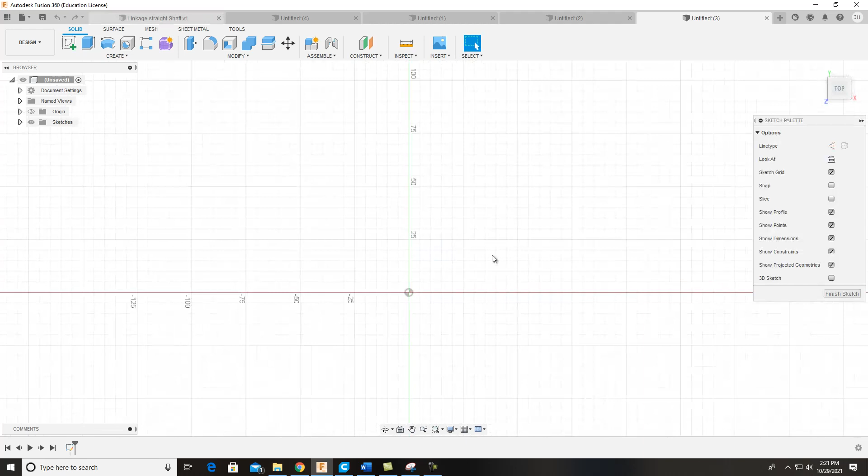So we go to File, New, or we're going to a new sketch, and I'm going to click right here. I want to use the same linkage pin size, 70, and I'll do a 50 here. Finish that sketch and extrude it out. I want 30 millimeters there. So again, this was 70 OD diameter, 50 ID diameter, and the thickness and depth of it's 30 millimeter. Go ahead and make that.

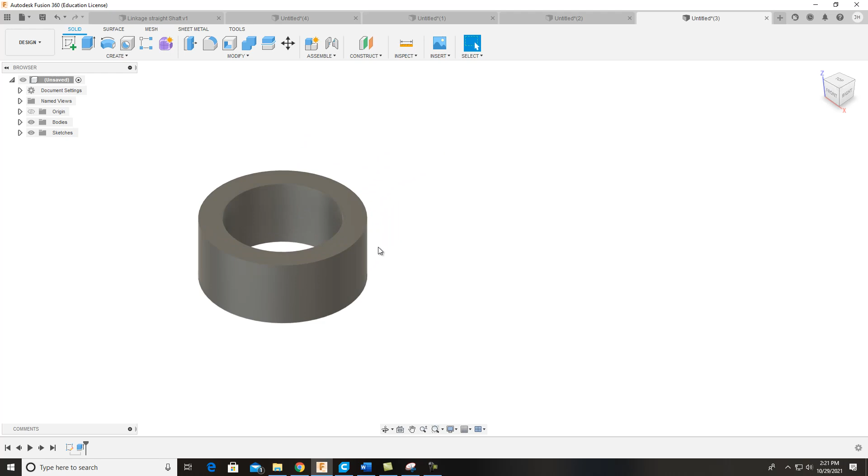Now we're going to put another one over here, the same size at 90 degrees. It's going to come up at an angle, like a bracket, an angle bracket linkage.

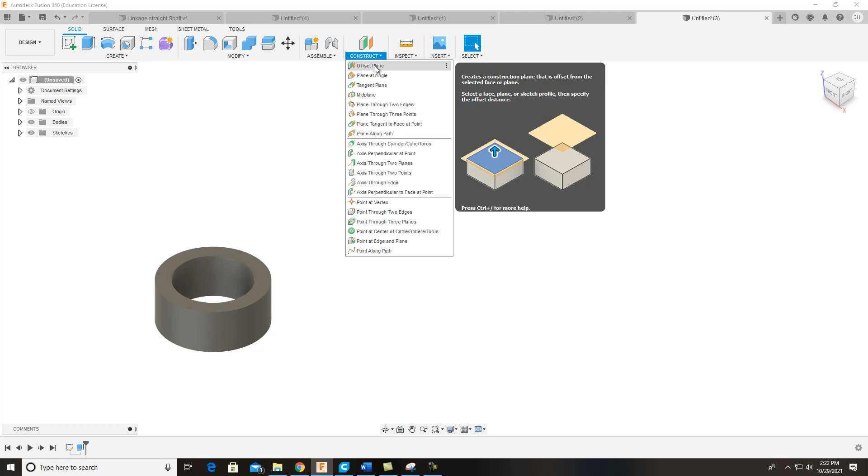What you're going to do on this one is come over here and construct an offset plane. I grab this one, come back 200 millimeter offset, and then hit OK or Enter.

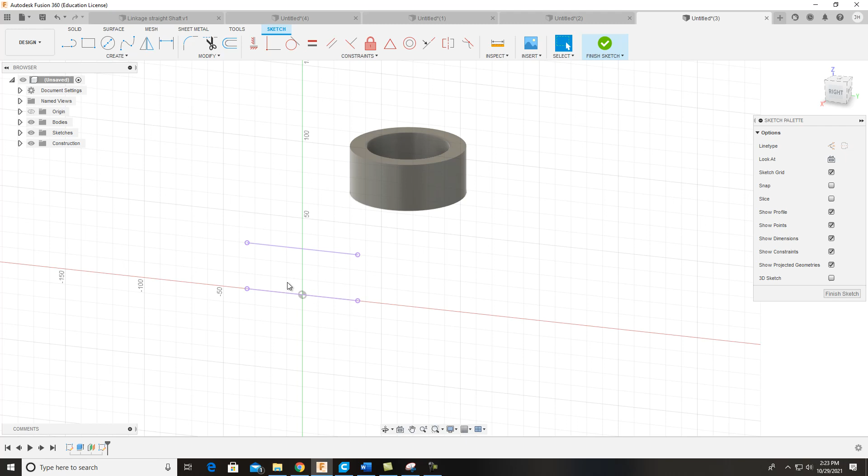Now, with that one, I want to do another quick sketch. I hit my sketch there, and before I do that, I want to project the geometry because I want this to be straight in line with this. So I'll go up here to Create, come down to Project, and I click on these lines here. If I turn it, do you see how I'm projecting that image onto my work plane, my sketch plane? So now I can use that.

Whenever I come up through here, see how I'm lined up? I got a little tracking line showing me that. So I come up here and do a 70, then a 50, and I got that in.

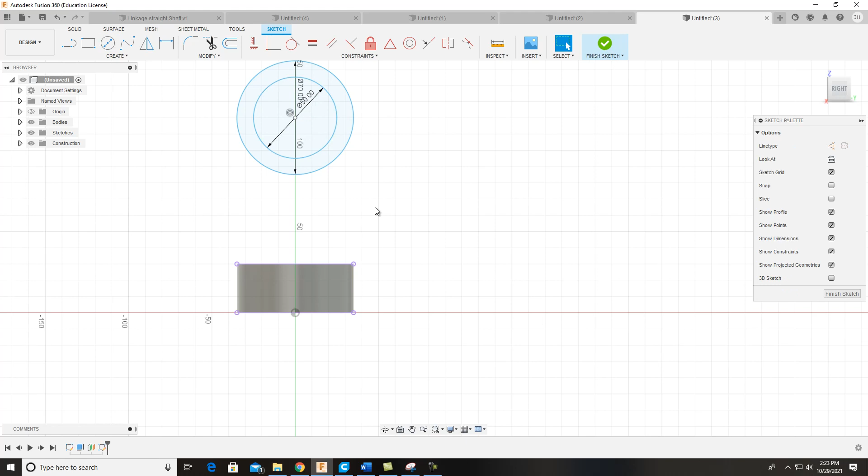Now I want to turn it a little bit so you can see it, and then put in from the bottom of this thing up to there should be 150. At this point, go ahead and stop and get your set exactly like I have it.

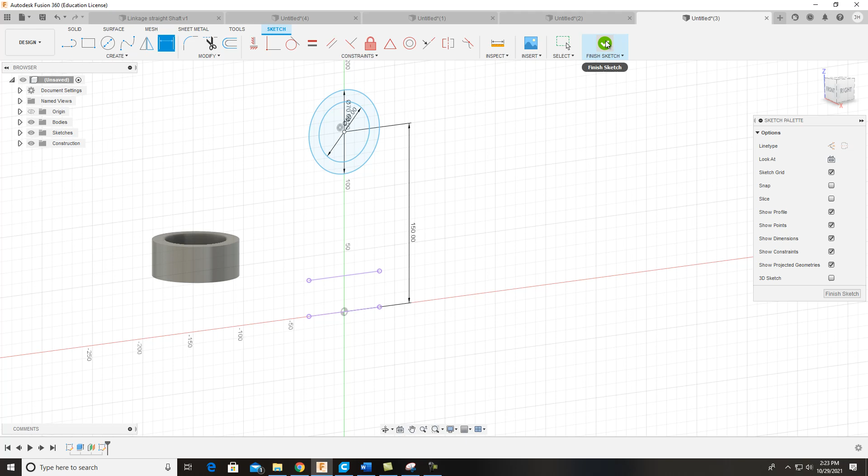All right, we're back. Finish the sketch out, and we're going to extrude it. When we extrude it, we want to go this direction, not this direction, because this is exactly 200, which was the spec, to this face. So it'll be a negative 30, exactly the same size as that one.

Whenever I start taking a look at this thing and turning it around, you see it's going from the center of it, you're going to have an angle bracket coming in. Now to do that, I need a work plane right in the middle of this.

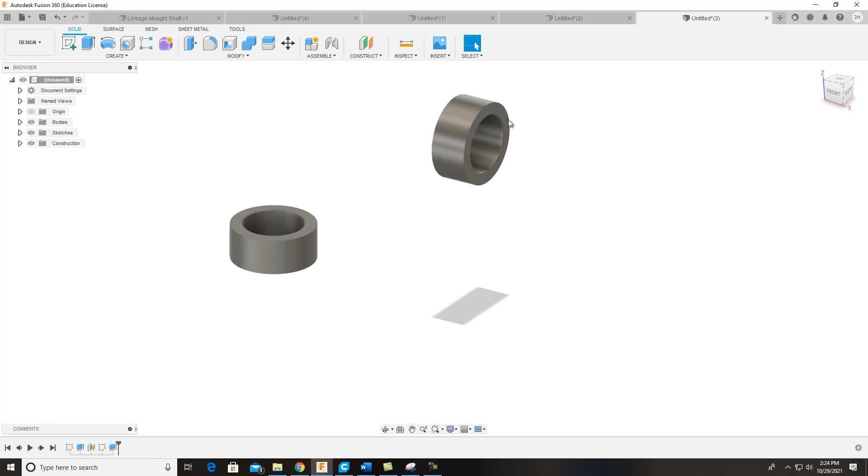If I come up here to construct, I can do tangent plane. I click on my part, and then up here at the top... let's kind of turn around here. Let's do it again, I accidentally hit that. Cancel that, do it again, tangent plane, and I've already got it snapped to it.

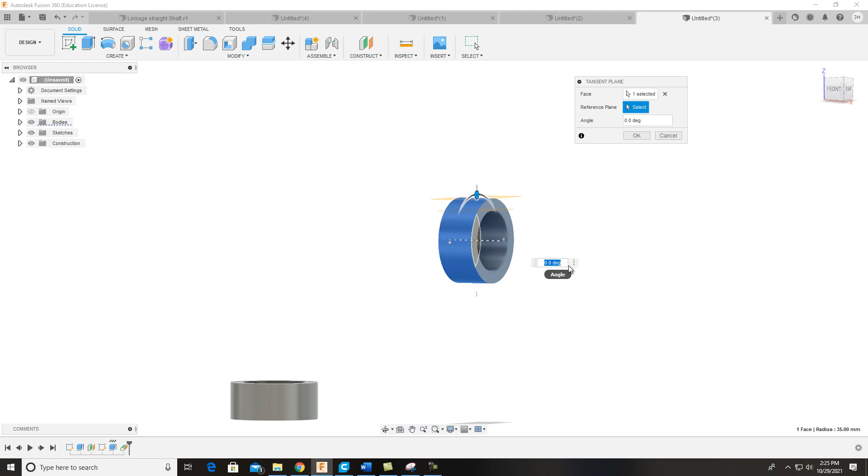I want to be on the top of that one, which would be perfect. I'll delete this one that I made earlier, and I could have used that one, but the only thing I want to do is go back up and make myself another plane. I'm just going to offset that plane because I know exactly that's 70, so this will be in a negative direction, negative 35, half of that. Puts me right in the center, exactly where I want to be.

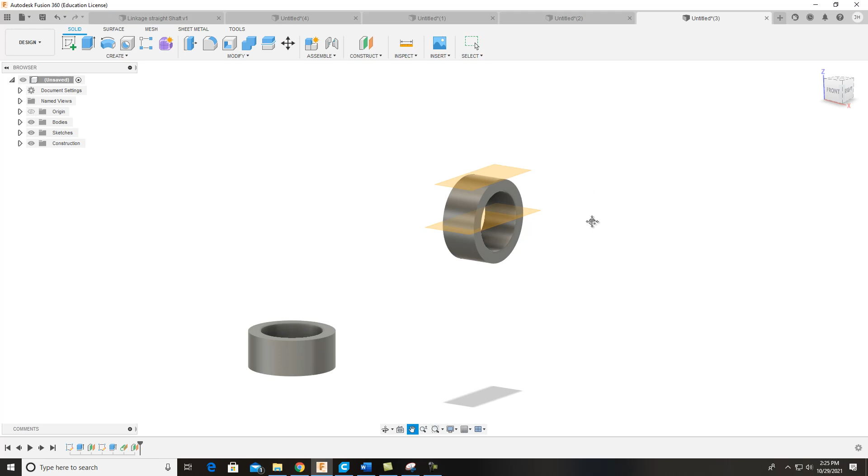And I'm going to go ahead and start myself a new sketch. So I click on this one, and I want to build myself an ellipse in here, okay?

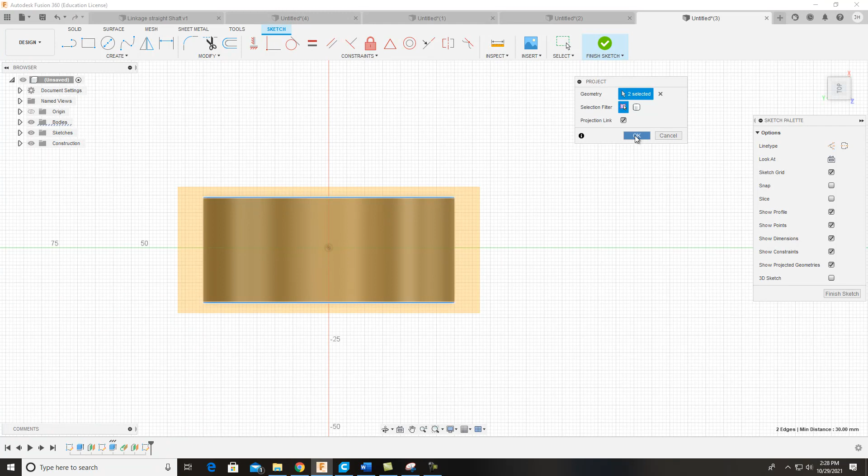And I am going to project my geometry. It didn't project on, so I catch that point and that point, hit OK. So there it is, that's on there now.

And what I want to do is put a line and just snap it from the midpoint of this one down to the midpoint of that one. This line will show where my center is so I can start my ellipse, because it didn't look right to me before. So when I zoom in, do y'all see where it's catching on that line, the midpoint?

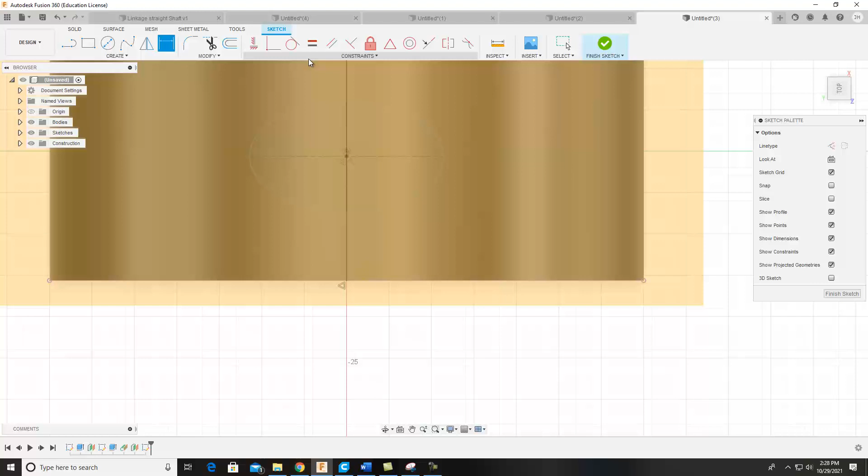And I click on that, click on this, and then I'll do a dimension. So yes, definitely, for sure, making sure dimensions are accurate is crucial.

So there's 25 that way, and I want to do 50 in the major axis. So it should look like that. And then if I were to do a dimension from that point to the center, it should be, let's see, 15. That's perfect because this depth was 30. So that's perfect, I'm happy with that now.

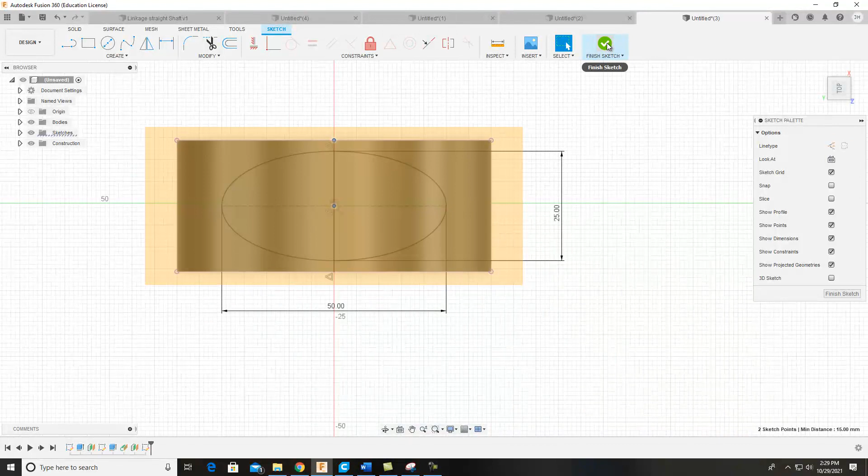I was getting frustrated with it. I didn't like the way it was. So now I want to turn it a little bit. So I got that one in.

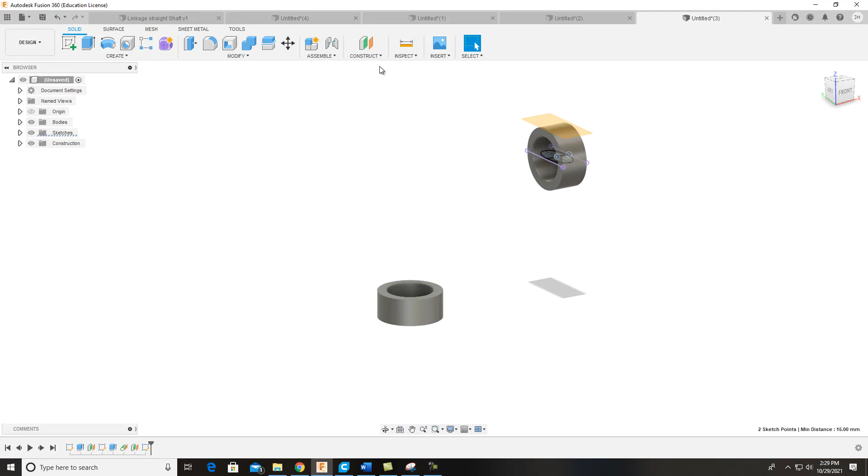And now we have got to get this one in. Now, what I'm going to do also is put another offset plane on this one. And actually, I can use this one and come down 70, and then plus another 100 would be 170, which would be a negative 170 because you're going downhill on this.

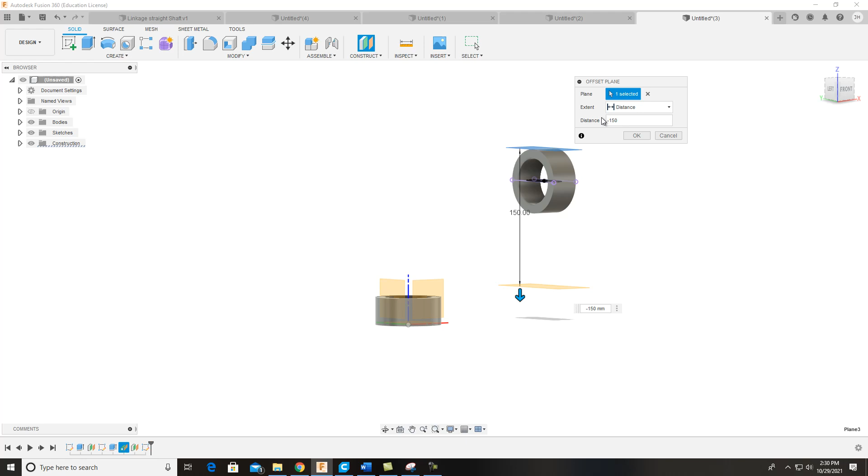Negative 170, and that's not what I want. I want 70, and that was 150. 70 and 70 would be a negative 150. So I don't like that either.

Let's do a negative 100 from the top of this, okay? So negative 100 from the main top of that would be just about where I want it, okay? So hit OK on that, and I've got another plane.

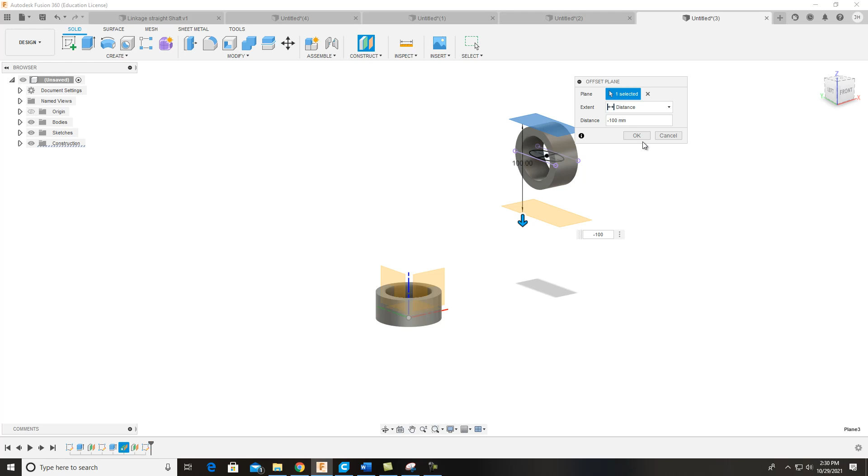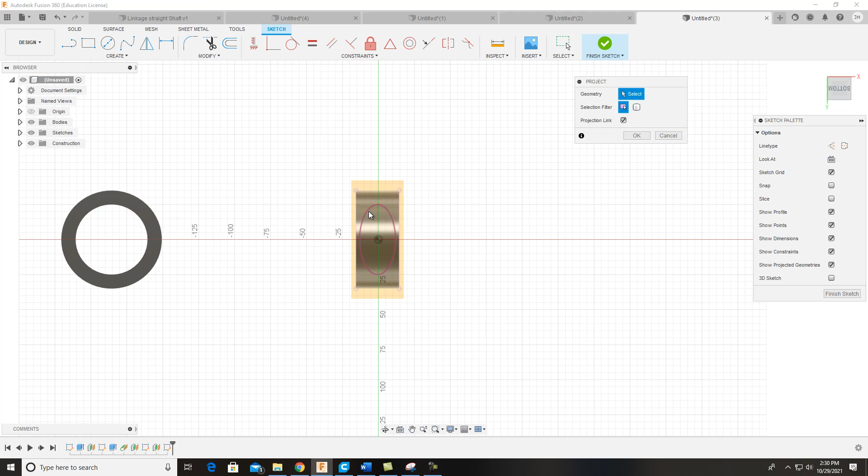All right, you're back. I want to go in here and grab myself another sketch here and click on this one. And I want to project that ellipse onto my new work plane, just like that, and hit Finish Sketch.

Oh, this is going to be pretty. It's going to come right down through here, and then it's going to come right down through here, and we'll show you how to do the rest of it here.

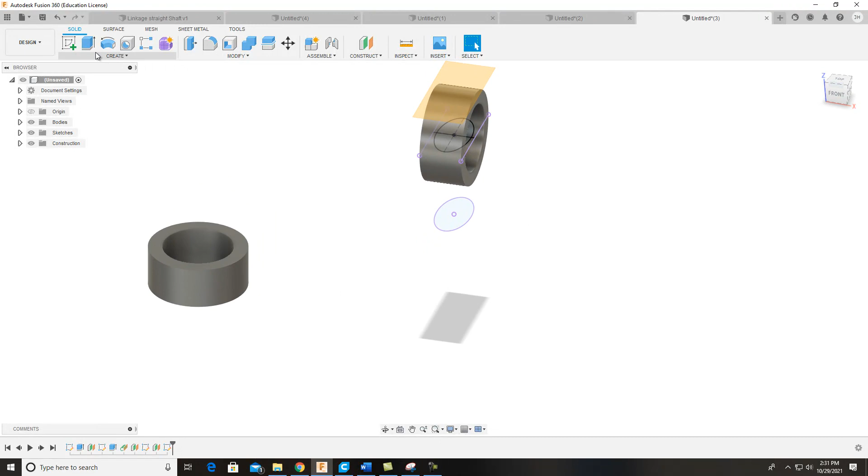So the next one I want to do is focus on making me a new sketch right on this plane. It's the same thing we've already done. Create, Project / Include. I want to click this, and hit OK.

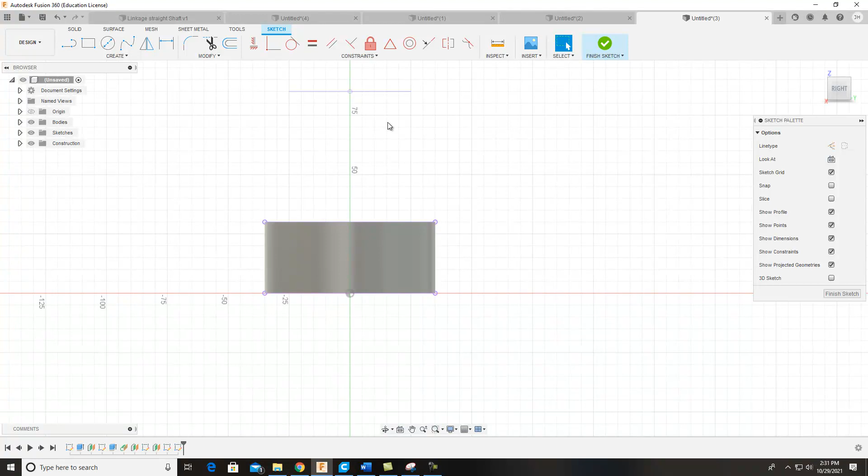And with that in there, if I turn it around, yeah, the lines are in there. I'm just going to do me a line from top to bottom so I can catch the midpoint of this line to make my ellipse again. And right there it is. Come over, come up, and then you can finish it up.

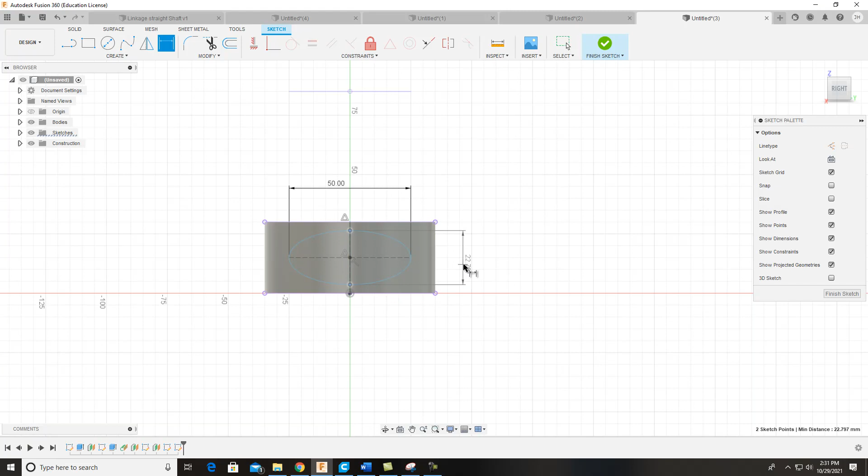I do 50, and then the minor axis is 25. Finish that one. And again, we went from the top of this down 100, and I believe it was 150.

And we're going to do this one the same way. And I think it was 150. I might have to take a look at that here in just a second.

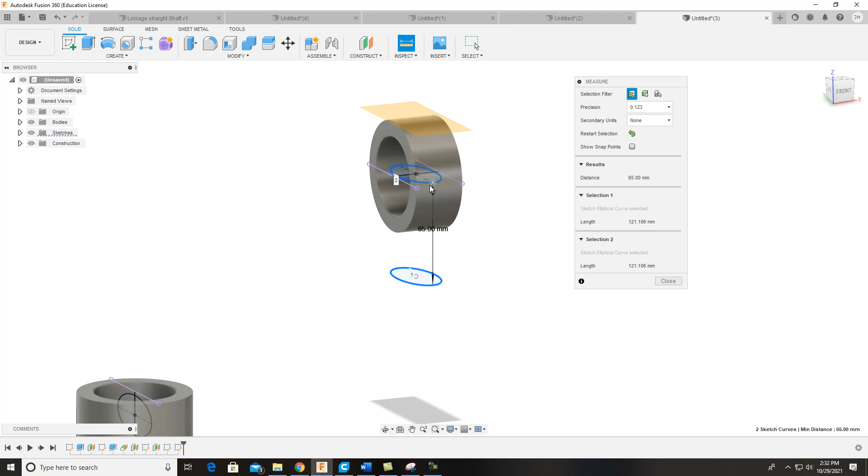I'll inspect it here, measure. I can go from here to there. That's 65. And we know that, and we'll get us a calculator here. Just make sure that we got everything in line. So 65,

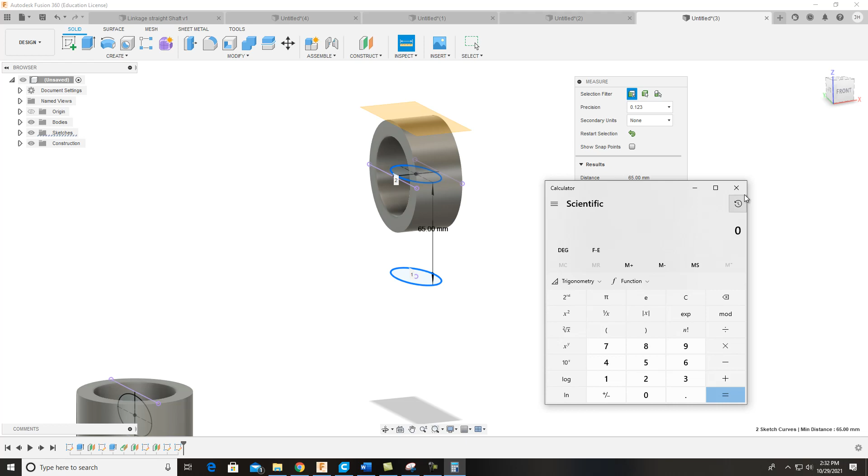and plus half of that's 35, so it was 100. So it's 100 from the top of this to right here, and we know it's 65. So we'll go to off center here at 65. Now, it might make it a little bit easier.

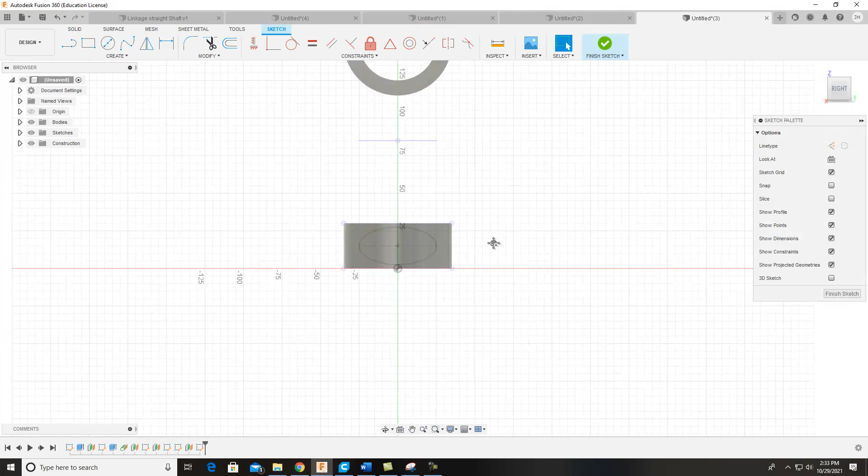Okay, so we'll do a simple 65 off the center. So I come up here again and do an offset plane. I catch this one, and I do a 65, simple and easy. Create new sketch, I'll click this one, turn it around, and I want to create, project that onto that plane right there, and OK.

Finish my sketch. So we've got everything. So at this point, stop and get it just like that, okay? And again, that's 65 millimeters from the center there, 65 down from this one.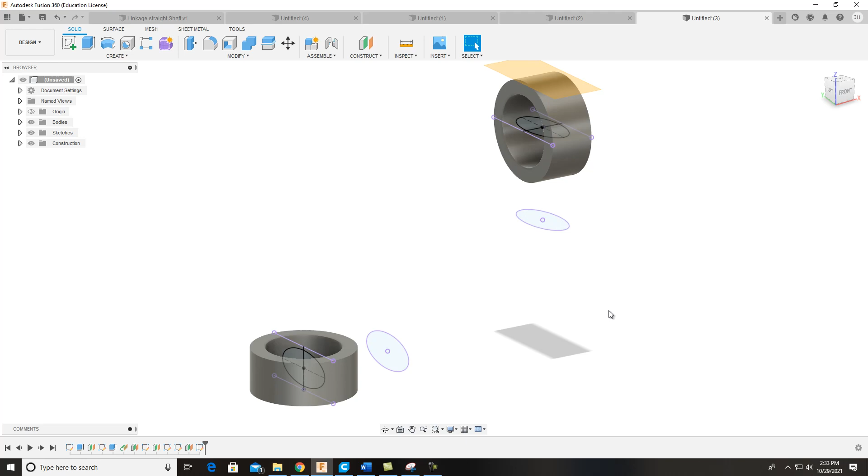All right, now let's loft this thing. You've got different tools here. Go to Create, we're in Solid again, Create, come down to Loft. Click on this one, make sure you get both sides, this one, and then of course this one, okay? Hit OK on that.

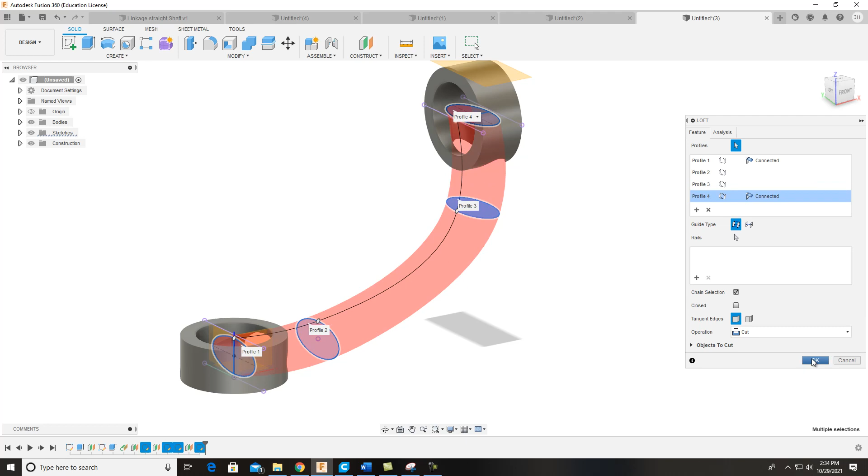Uh-oh, y'all see what it did? It cut it instead of loft, so make sure that you don't do that. Let's come back in there, get that put in, and make sure it's a join instead of a cut, and then OK. So here's that bracket with that strange angle in there, right?

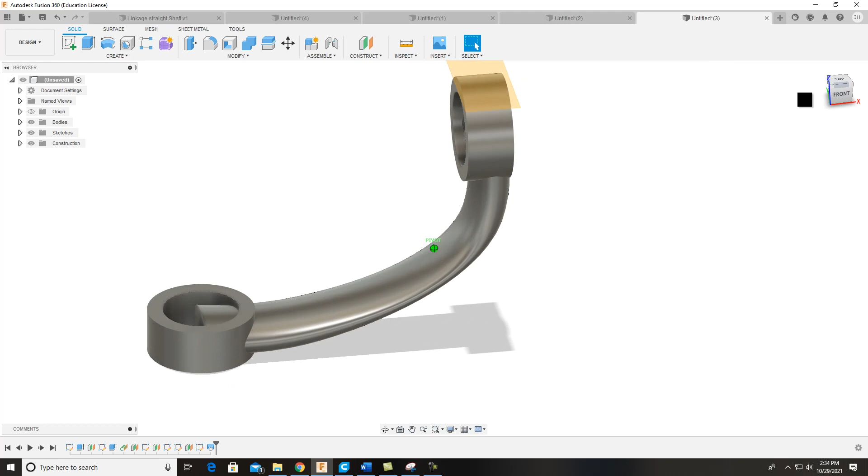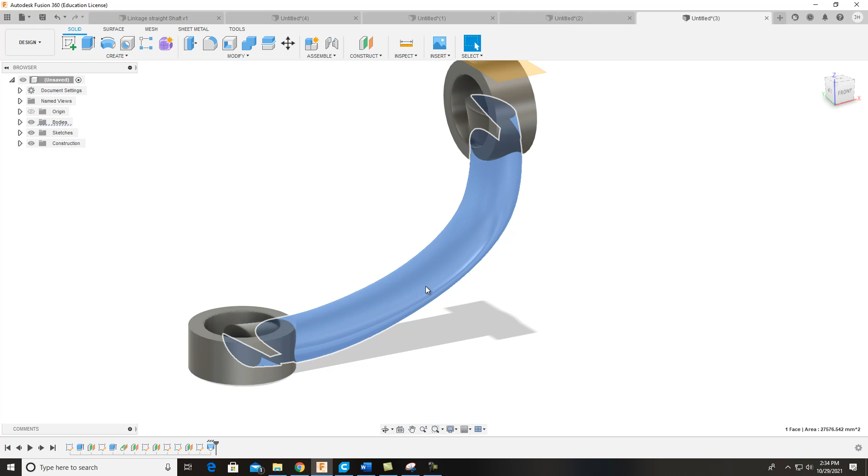So we look at that and we're like, oh man, when I click on it, this is not a mesh, or this is not a form. This is not anything I can sculpt. Oh, you know what you got to do? Delete that out, come down here to history and delete it out, or undo it. Let's just undo it that way you keep your sketches.

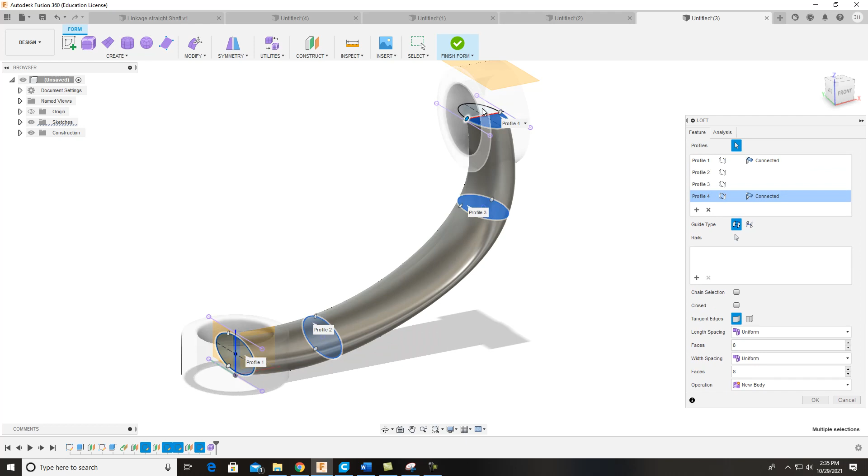But what you want to do is come up here and click on Create Form, and then inside the form, you come down to Loft. And now, when you do that... let's go back again. While we're still in form, I accidentally hit the wrong thing there. Make sure that you click on the right buttons here. I've got so much going on there I can't see really well.

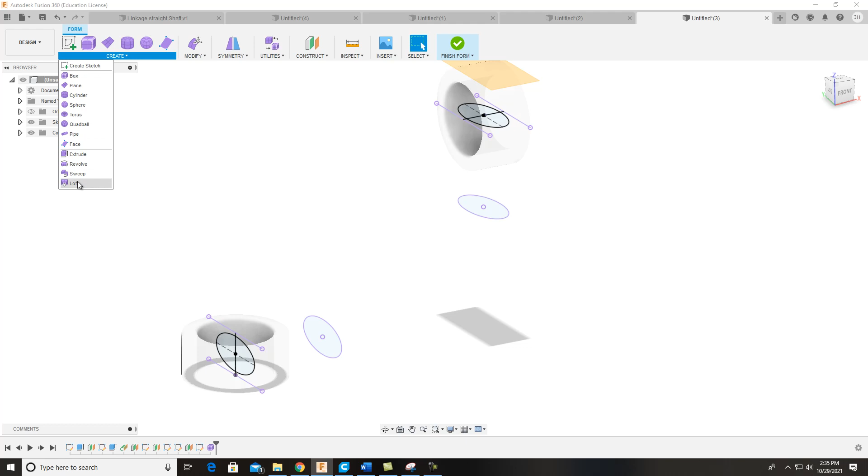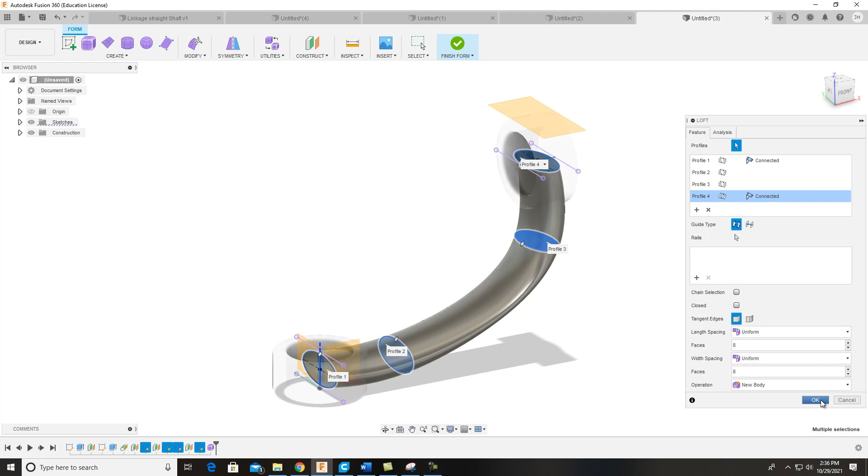Now this one's a tricky one. It's wanting to catch everything. There, we got it, we finally got it all. Make sure it's not going to cut, make sure it's going to finish form. All right, there's that form.

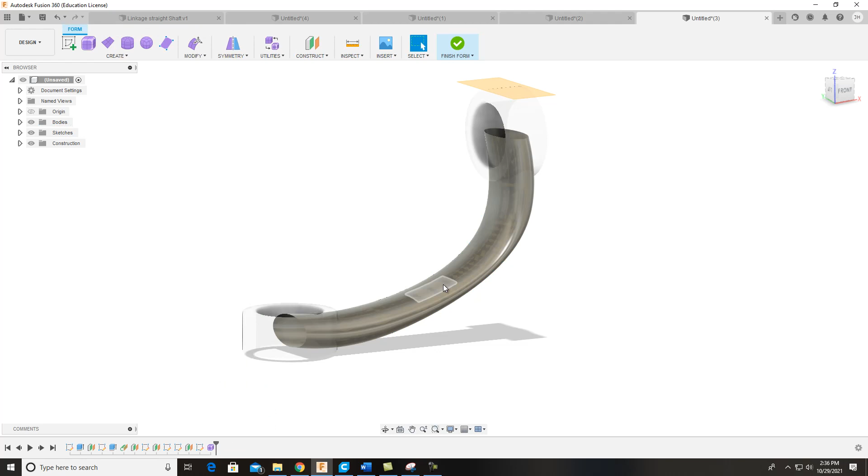The difference is if you'd have left it in solid modeling, you couldn't have done anything to it. This way, we can actually do a little bit of work on it, okay? We can now go in and right-click, go Edit, and you all see now you've got your sculpting areas.

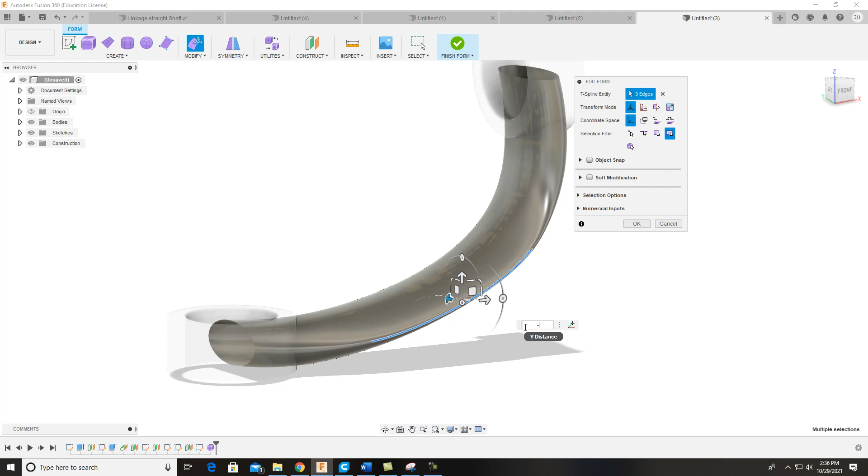So I want to come in here, I'll grab that line, right-click, and I will do Edit Form. I can actually grab that. And then, watch your numbers here, I want to do -20 so I keep everything symmetrical. I'll come over to the other side and catch the exact same lines on that side, and then I'll right-click, Edit Form.

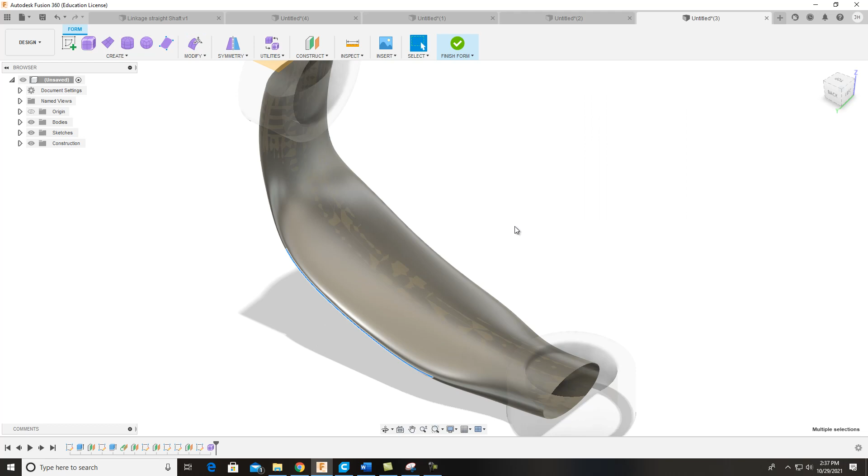And you guys kind of got the idea. This one will be 20 as well, that way we keep everything symmetrical. All right, it's looking good, guys, looking good. So we got everything looking symmetrical. And if you want, right down the middle here, you might want to put a little strengthening line through here or something, kind of let it bend up just a little bit.

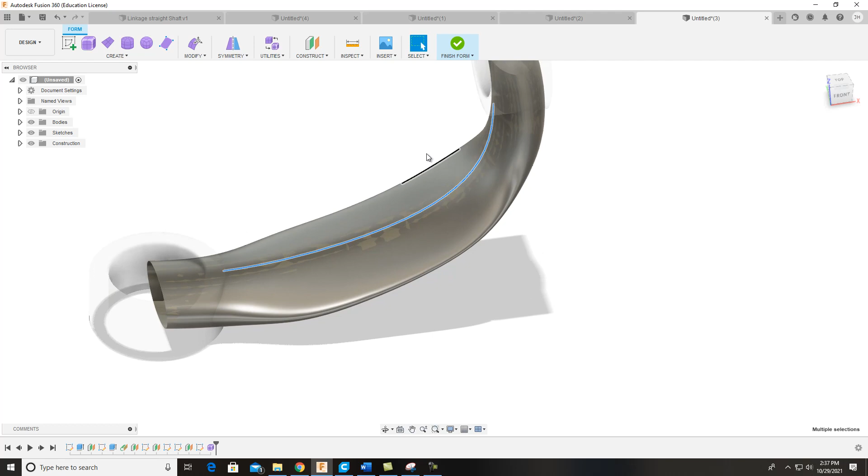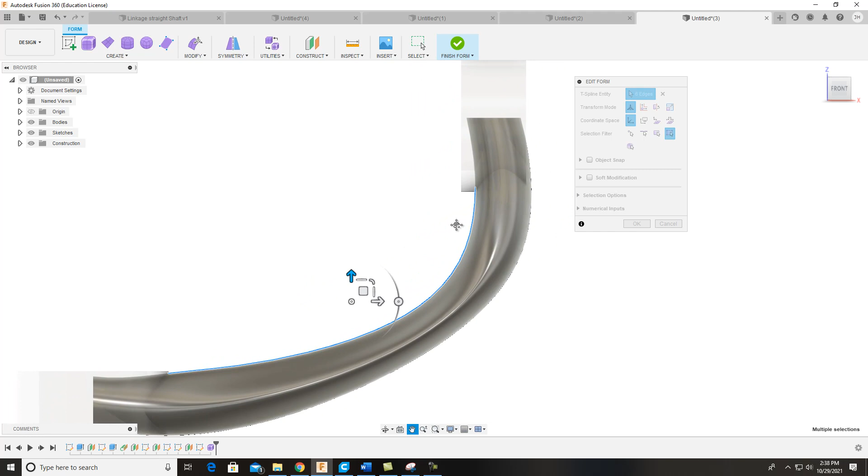We'll do an Edit Form. You want to grab that and kind of pull it up, make like a little V to it. I'm just going to make sure I don't go past any of that. And I didn't, so that turned out pretty good. That's looking great, that's looking great. Might have been a little bit too much, it's kind of got it back that way. So that'll be okay.

That looks pretty good. Kind of don't like the way this is back here in the back. What we need to do on that is, okay, right here, we need to catch a few lines on the back side here, and we're going to have to pull them in just like that. Edit form, grab that, pull that in just a fuzz so that it's not in the way of anything there.

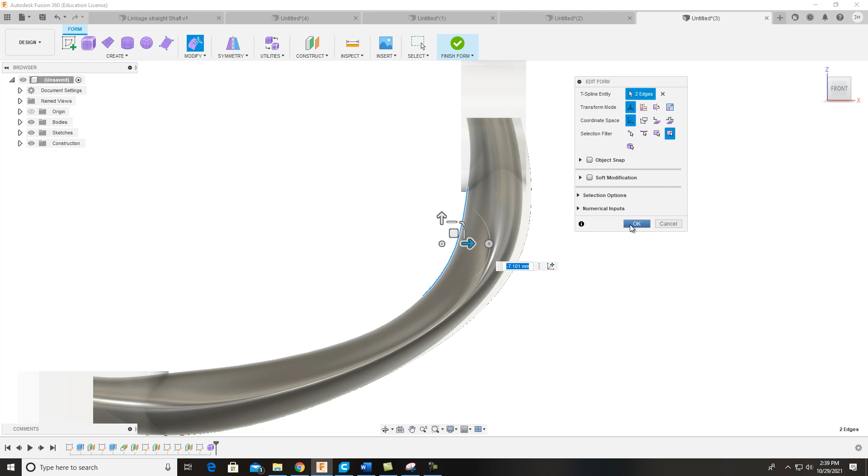Kind of beef it up right there just a fuzz. Still not liking this too well right here. I'll grab that one, Edit my form, pull that one in just a little bit more.

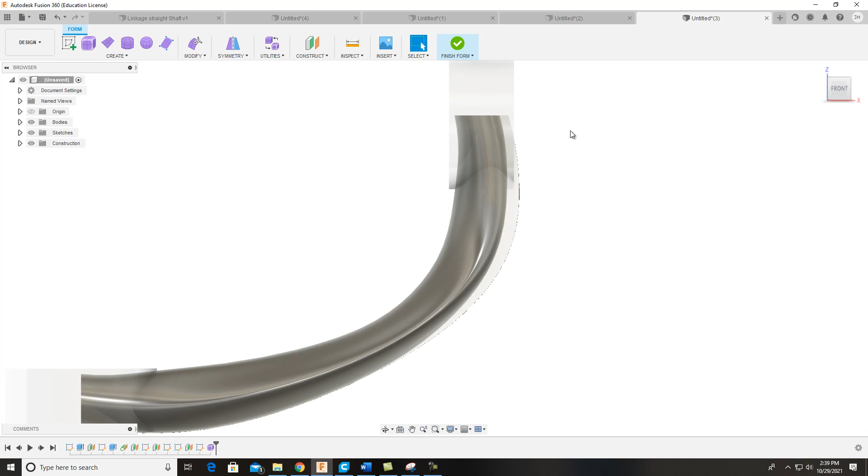That looks better. So I finished my form, and I've got this weird looking shape. It's pretty cool though, and you guys can do something similar to that. It's up to you how you want. As long as you got all these in the right spot and the offset, you can design this bracket, this spline, any way that you want.

So the last thing you got to do is, of course, we've got to go in here and surface, patch the ends, patch the end of that. Okay, we got to patch the end of this one, if y'all remember.

And now we got to turn this into a solid model. Also, I come in here and turn that one on and hide that one. That way, when I come in here and do my stitch and grab everything, it should be 3. I hit OK, and that becomes a solid.

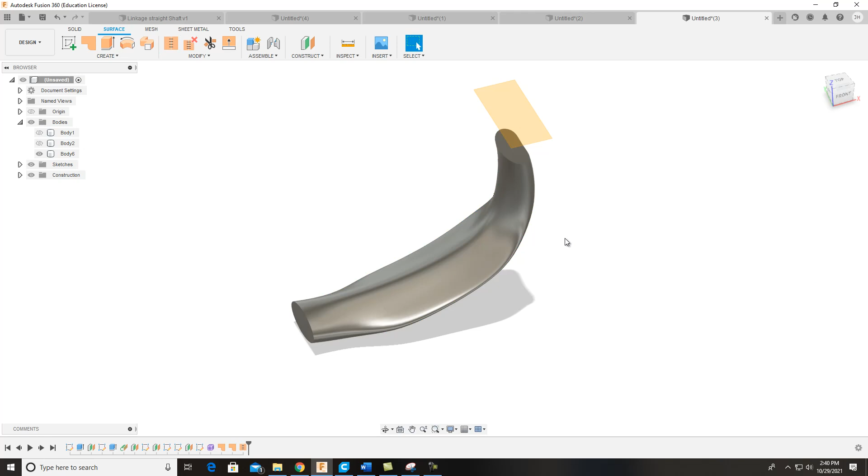Now turn my bodies back on. They should all be one piece now, or solid. There's 3 pieces now, but all I have to do again is go back to solid, hit combine, and of course we want to join these 3 pieces together and hit OK. So now they all should be joined.

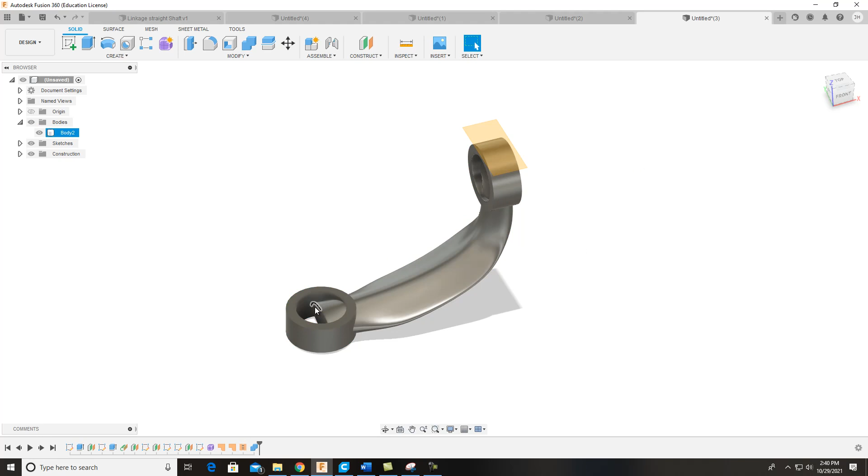In here, we're just going to cut that out. That's the quickest way to do that. Right on that surface, turn it around here, go to the center, come right there. Finish sketch, extrude, and you just turn it around, and automatically it'll come up with cut.

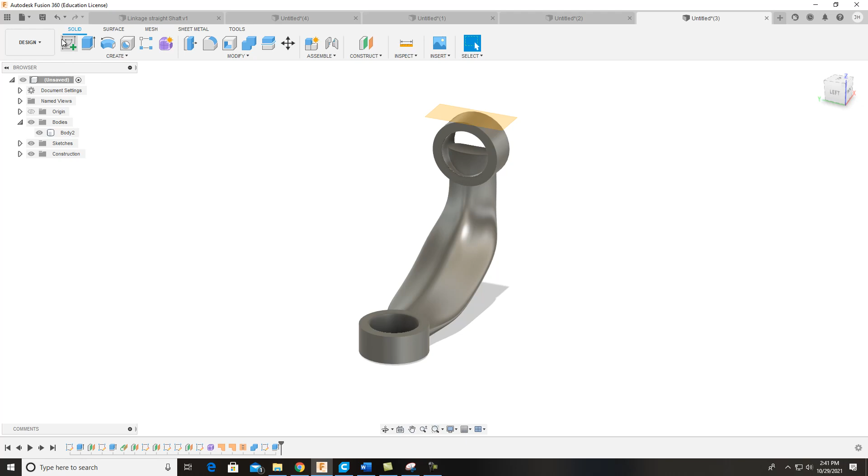There it is. Come over here, do the same thing on this one, finish sketch, extrude, grab it, pull it back through there. It'll automatically get cut, and there is your part. Okay?

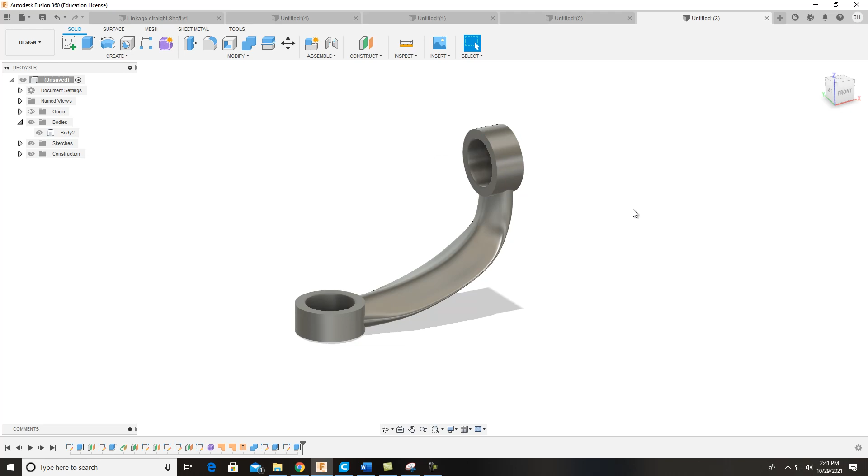I'll turn the visibility off on that. So there it is, pretty neat. And I want you to put your initials on it somewhere.

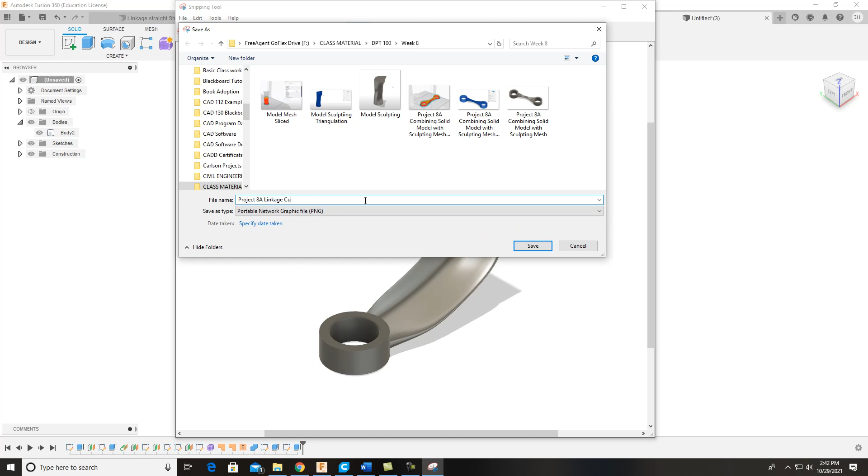So now I want to do a snipping tool, get a picture of it. That way I'll know where it's at. File, and put it in here. This is project 8A. This is linkage curve, or curve linkage. That's good. We got that one.

Next thing I want to do is come in here and select 3D print and click on it. See how the whole thing clicks? I got a preview mesh. Oh, there it is. Everything high is perfect. Look, there are 27,974 number of triangles.

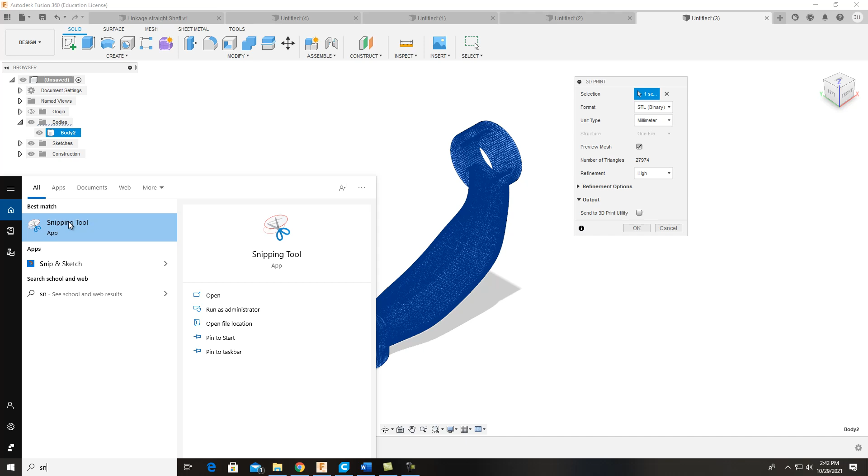So I come back in here, snipping tool again, new. Grab that and bring that in there just like that. File, save as. Again, this would be project 8A. This is the curved linkage.

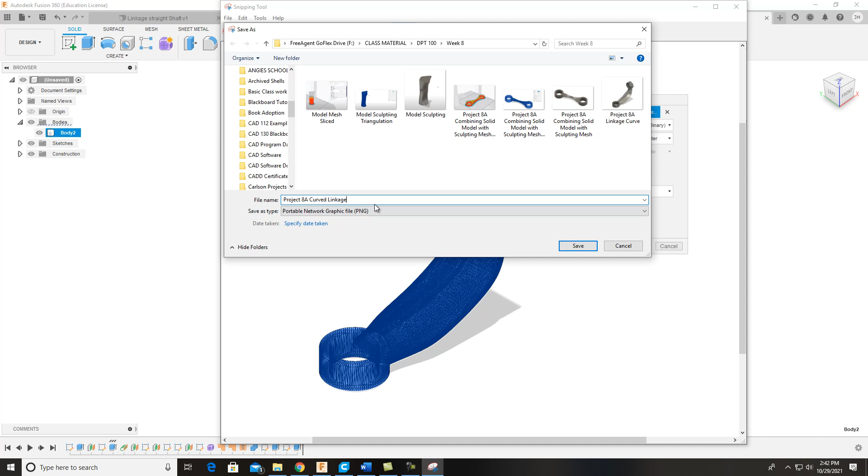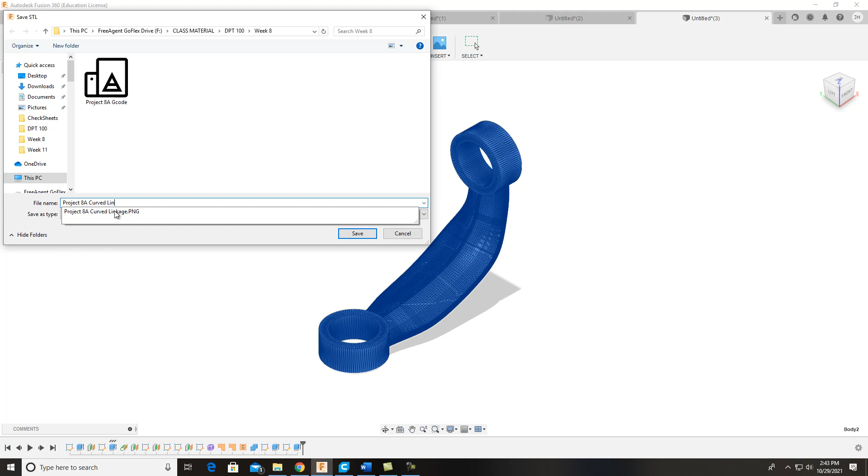Save. And then the last thing that we've got to do, guys, is to take that STL file that we made, and I've got it here. I just hit OK on that, and make sure I put it somewhere. This is project 8A curved linkage. Hit save on that. I know where it's going to.

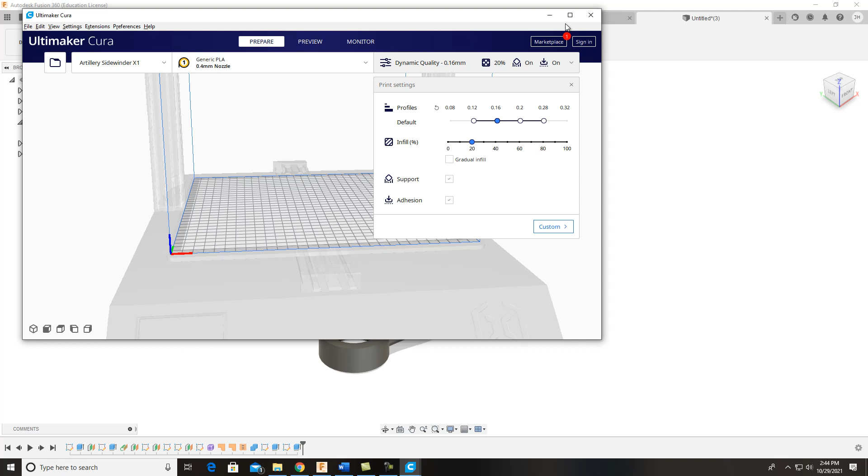Open up Cura, and this is the last one we did. Okay, Cura is opened up. So I'll come over here in my folder. I want to bring that curved linkage in, and that's probably going to be the best way that I can put it in.

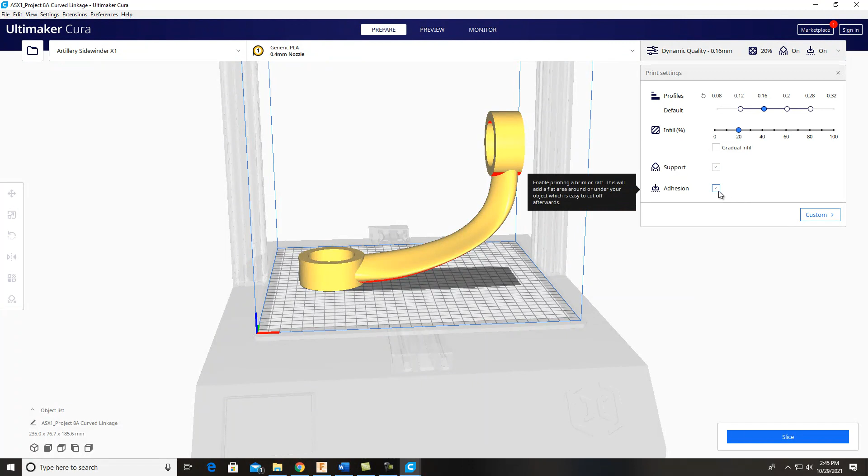I'm going to have a lot of support on this one. So 0.16 infill at 20 is okay with that. Support's on, adhesion's on, and I will do this. Gyroid would be the best for this one. So I do a slice on this. Let's see what it looks like with the support.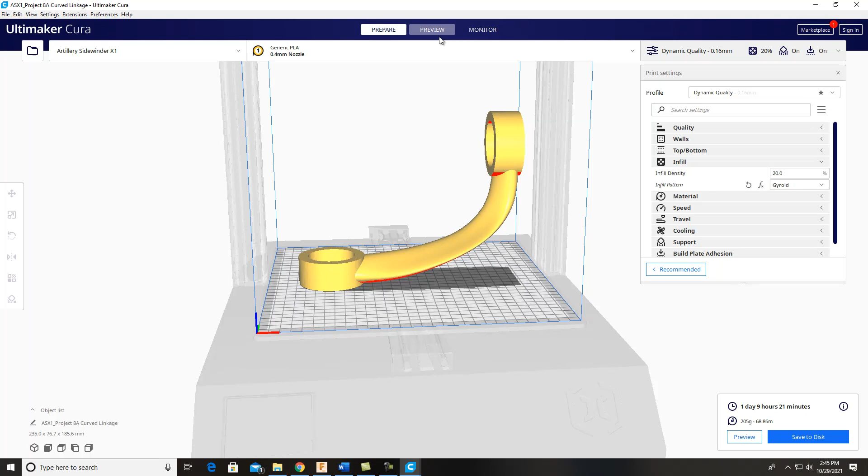So this is 1 day, 9 hours, and 21 minutes. This is a big project. Let's do a preview of it and see what it looks like. A lot of lines here, a lot of code.

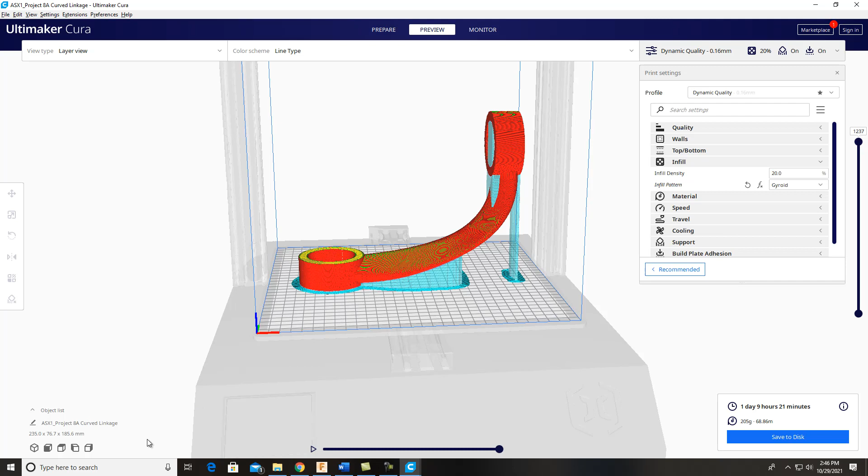So right there is how the design is going to look, folks. This is all support. You see how the support's coming up and holding this in place? And that will be breakaway. So you'll be able to break that away, but this will be the part, and this is what I want you guys to get turned in.

And I want to cut down into it just a fuzz, just to see. Yeah, it's all there, you can all see that. It's solid all the way through it, and I want you to do that about halfway, just like that, so I can see the inside of it. And then do yourself a snipping on it.

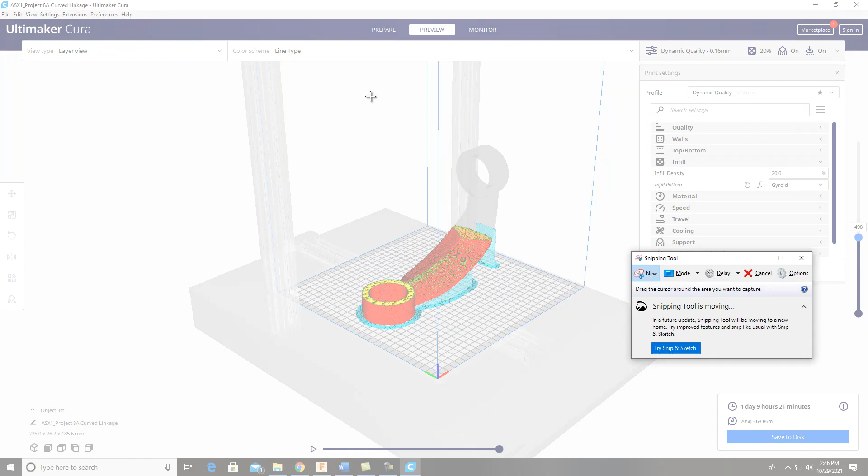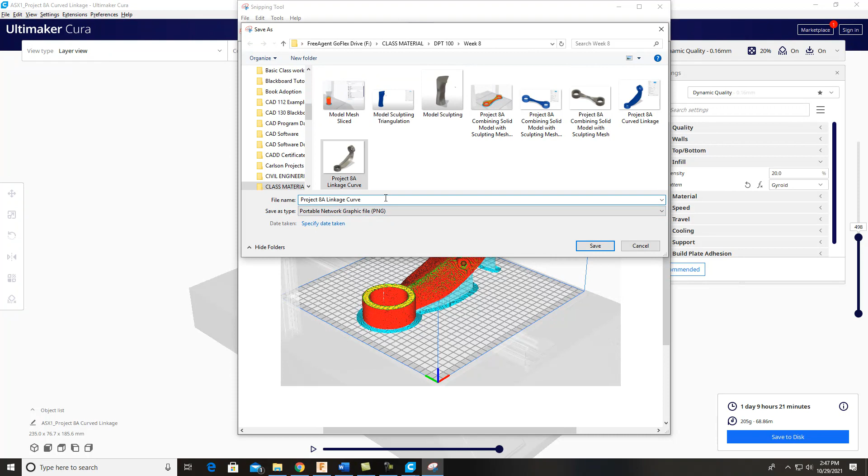Snipping tool, new, and bring that in here just like that. Curved linkage, save that one. Curved linkage, click on that, curved linkage, and I'm just going to make it a little different so I don't lose it. So that one's there. And then also save your G-code in there, curved linkage, save.

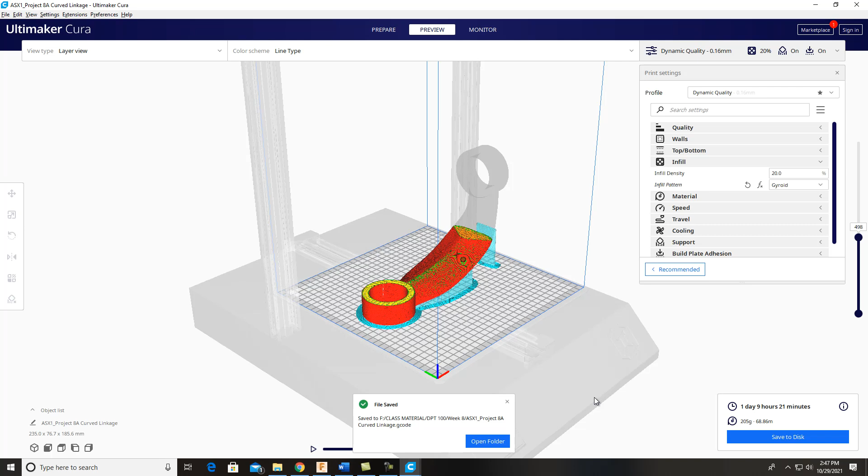And after that, you're going to put that all on that submission Word document and send it to me. Just make sure, guys, you put your initials on these things. If you need help, this is getting pretty technical and some complicated material. If you need help, let me know.